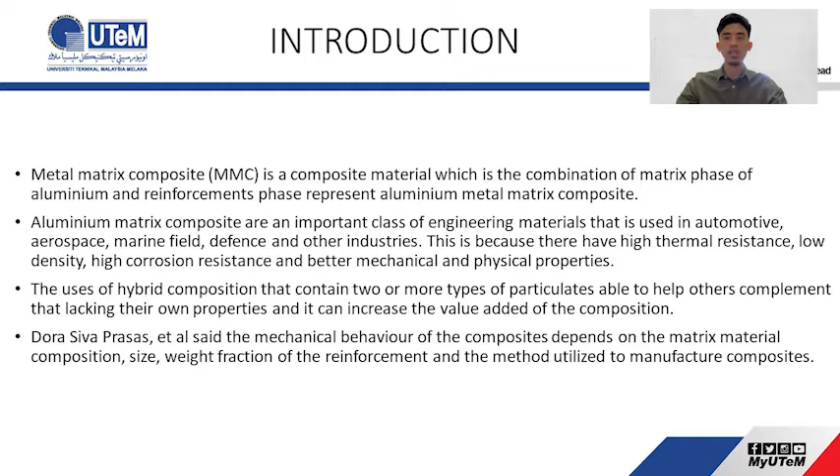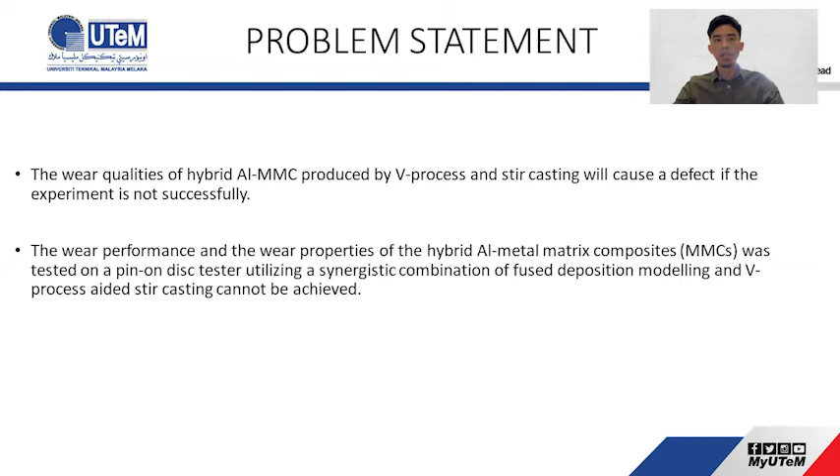For problem statement, the first one is the wear qualities of hybrid aluminum metal matrix composite produced by V process and stir casting will cause a defect if the experiment is not successful. And then the wear performance and the wear properties of hybrid aluminum metal matrix composite tested on the tester utilizing a synergistic combination of fused deposition modeling and V process, and stir casting cannot be achieved.

For objective, the first one is to investigate the effect of carbon nanotube and graphene addition to reinforced aluminum matrix composite. Next is to examine the microstructure evaluation in the reinforced aluminum matrix. The last one is to study the wear properties of carbon nanotube and graphene addition in the aluminum composite.

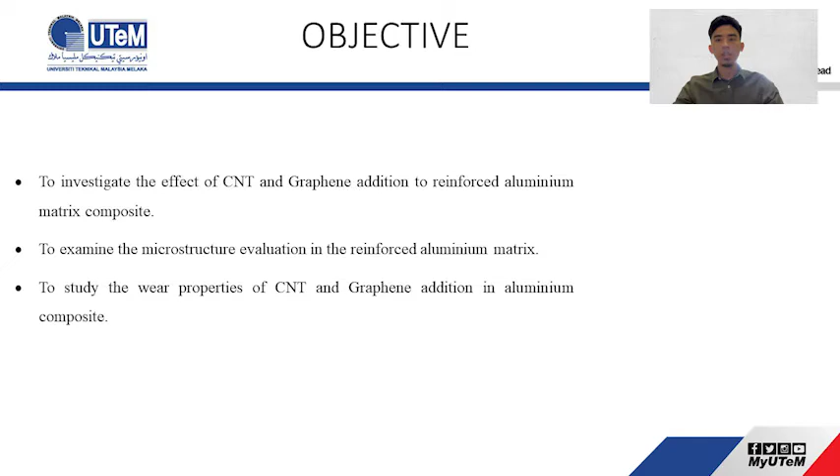For the scope, the first one is the wear properties of hybrid aluminum metal matrix composite that was created using a synergistic mix of fused deposition modeling (FDM), V process, and stir casting. A perforated pattern created using FDM is employed in the V process to form a hollow which is then filled with molten metal, incorporating particle reinforcement manufactured via stir casting.

And then the green procedure that results allows matrix composite to be cast quickly, and wear performance was examined on a pin-on-disc tester. And then to attain high strength, low density, corrosion resistance, easy workability, and outstanding tribological characteristics, hybrid aluminum metal matrix composites are being developed.

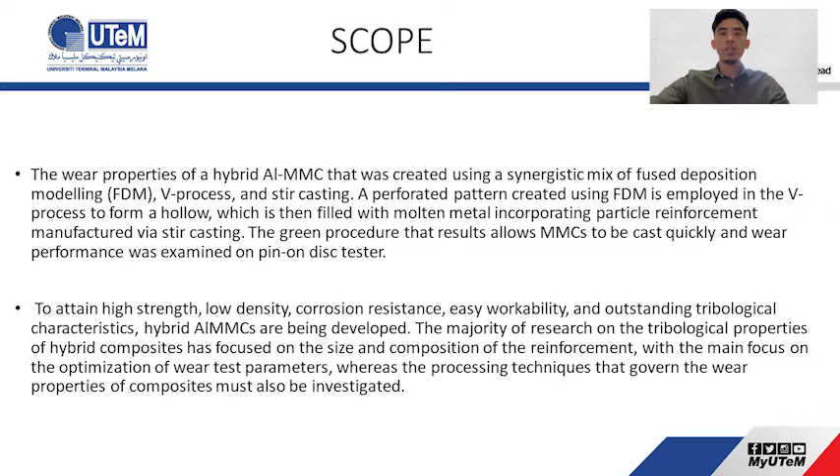The majority of research on the tribological properties of hybrid composite has focused on the size and composition of the reinforcement, with the main focus on the optimization of wear test parameters, whereas the processing technique that governs the wear property of composite must also be investigated.

The first literature review is by Jenix Rino. The finding is stir casting may be used to successfully manufacture aluminum alloy matrix composite reinforced with hybrid. Stirrer design and location, stirring speed and time, melting and pouring temperature, particle preheating temperature, particle integration rate, mold type and size, and reinforcing particle size and quantity are significant process factors for synthesizing hybrid composite by stir casting.

Next, by Asmaa Wajeah, the finding is the key advantage of aluminium matrix composite over unreinforced materials. Improved strength and stiffness, reduced density and weight, improved high temperature properties, controlled thermal expansion coefficient, thermal heat management, enhanced and tailored electrical performance, improved abrasive and wear resistance, mass control, especially in reciprocating applications, and improved damping capabilities are just a few of the benefits.

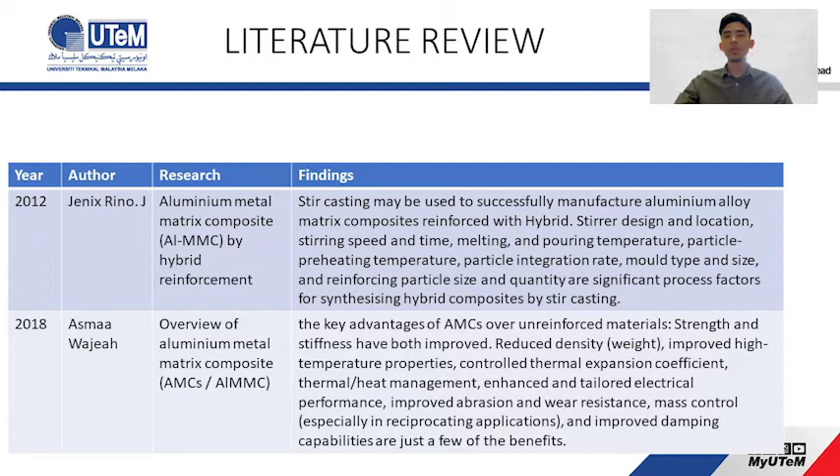And then by Ahmad, research on the advantage of aluminium metal matrix composite hybrid reinforcement. The finding is the influence of particle size on the hardness of Al2O3 reinforced aluminium, and found that fine particle reinforced composite had higher hardness than coarse particle reinforced composite.

The aluminium metal matrix composite with silicon carbide reinforcement is also a promising addition to the metal matrix composite family. Low specific gravity, excellent thermal conductivity, and low corrosiveness are all key features of aluminum SiC metal matrix composite, and it can operate better under harsh service circumstances.

And then, effect of carbon nanotube and graphene addition. The first one is a combination of two carbon nanofillers with different dimensionalities can provide a powerful synergistic effect that outperforms the performance of each nanofiller alone. The mechanical characteristics of nanofiller are influenced by the geometry and morphology of the nanofiller.

And then matrix composite with the carbon nanotube graphene hybrid nanofiller will outperform pure metal in terms of mechanical quality. The enormous specific surface of graphene and carbon nanotube is critical for producing nanocomposite with outstanding mechanical characteristics.

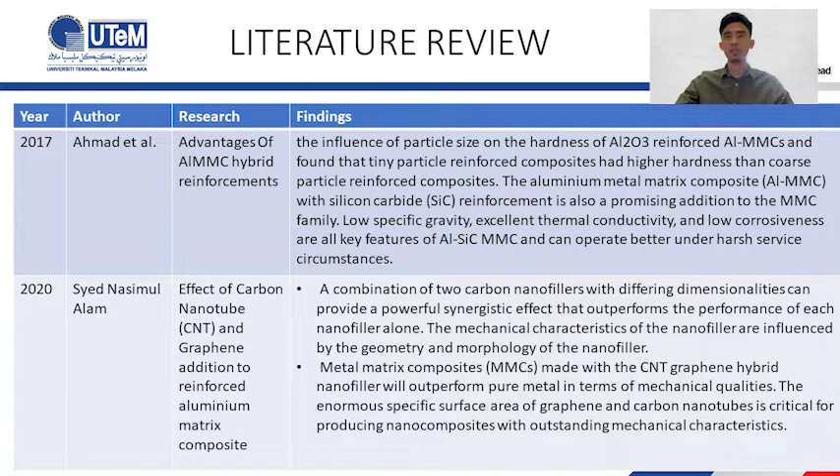And then, research on microstructure evaluation in reinforced aluminum matrix. The finding is aluminum matrix composite reinforced toughness with linear rise in the graphite.

The number of graphite particles drops content regardless of the production procedure used. And then aluminum matrix composites with graphite particles have limited hardness. And then carbon materials such as one-dimensional carbon nanotubes and two-dimensional graphene have emerged as a significant new class of material for structural engineering and functional device applications due to their extremely high elastic modulus, 1 TPa, and mechanical strength up to 130 GPa, typically 10 GPa, as well as excellent electrical and thermal conductivity.

And then, for properties of carbon nanotubes and graphene, in terms of tensile strength and elastic modulus, carbon nanotubes are the strongest and stiffest material yet found, revealing that individual carbon nanotube shells can withstand pressure of up to 100 gigapascals.

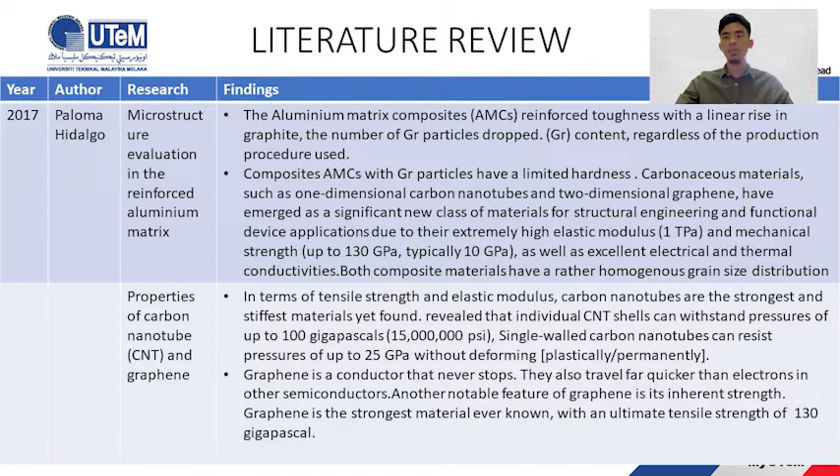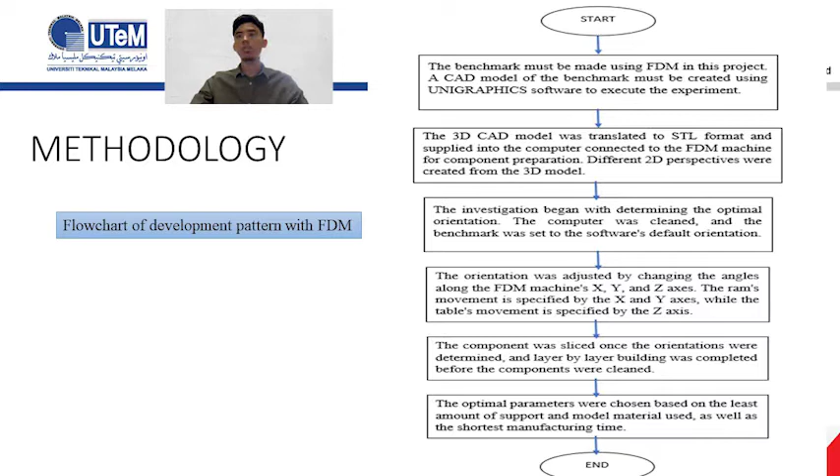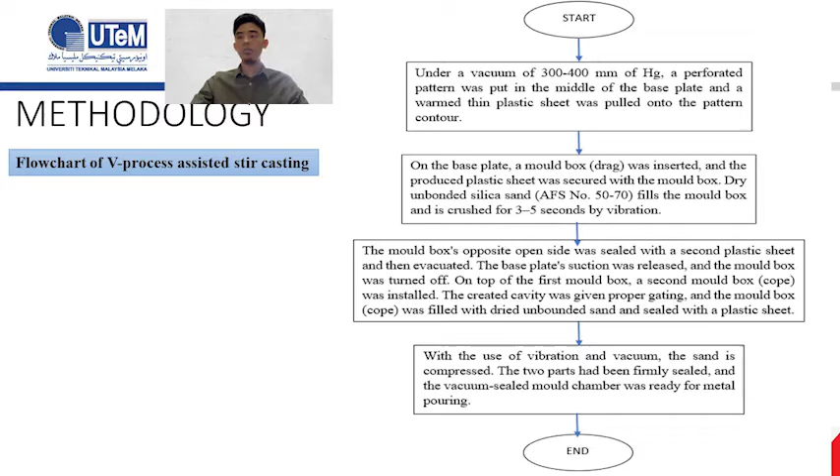The base plate suction was released and the mold box was turned over. On top of the first mold box, a second mold box was installed, and then the cavity was given proper gating, and the mold box was filled with the unbound sand and sealed with a plastic sheet. And then with the use of vibration and vacuum, the sand is compressed. The two parts had been firmly sealed, and the vacuum sealed mold chamber was ready for metal pouring.

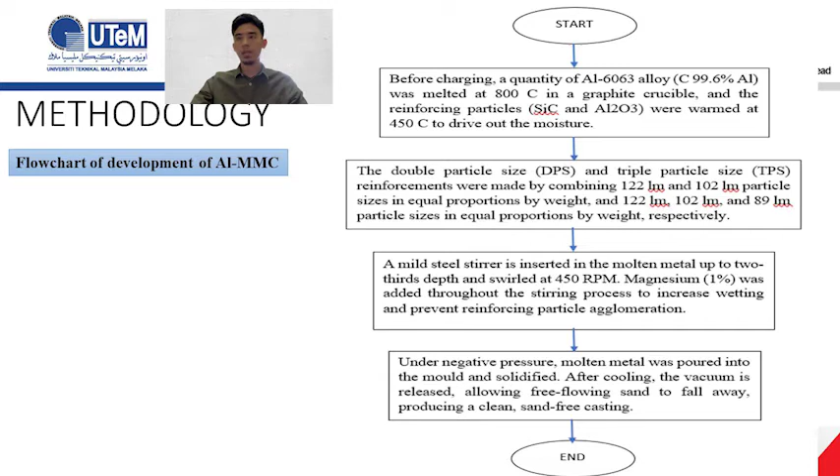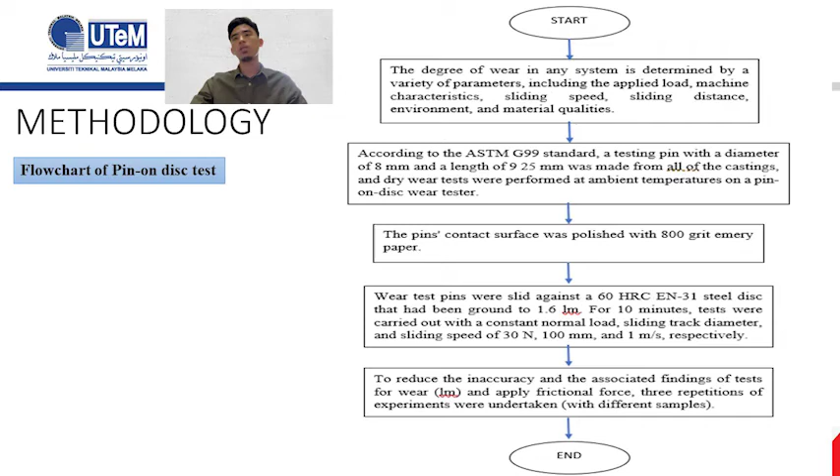So the expected results: the first one is to attain high strength, low density, corrosion resistance, easy workability, and outstanding tribological characteristics of the hybrid aluminum metal matrix composite. The last one is the wear properties and wear performance of the hybrid aluminum metal matrix composite that was created using a synergistic mix of fused deposition modeling, FDM, V-process, and stir casting, and examined on a pin on disc tester can get a better result.

So that's all. Thank you.